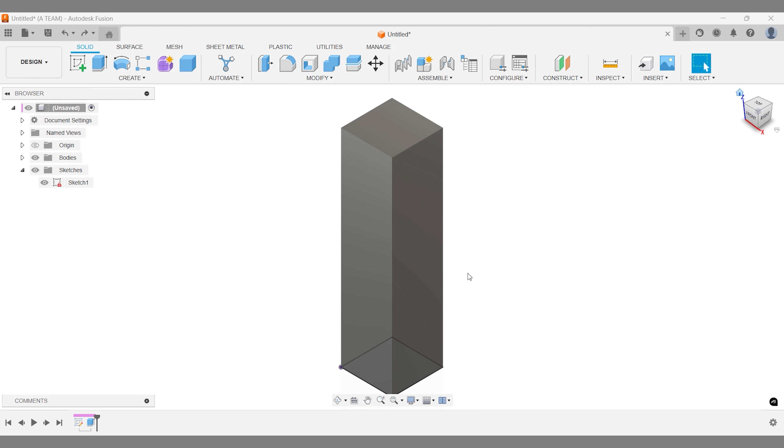Full round fillets automatically adapt to geometry changes in Fusion. This feature is particularly powerful when you're designing parts that will go through multiple iterations or adjustments, as it helps maintain a smooth and efficient workflow.

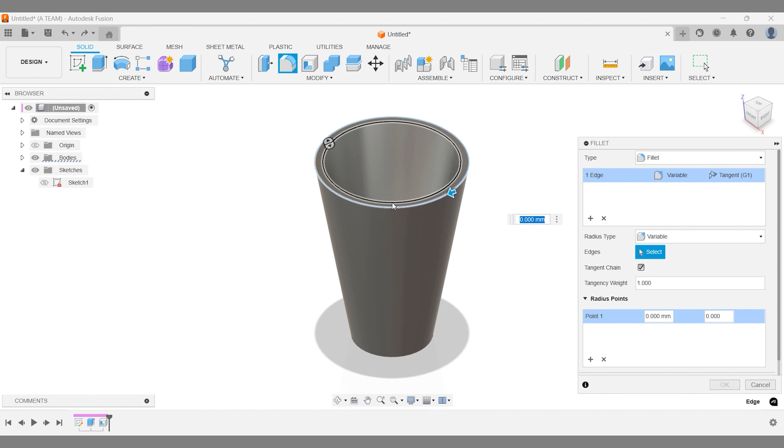Fusion allows you to create variable fillets with adjustable radii along the edge. This is perfect for organic designs or components requiring varying curves for aesthetic or functional purposes. By adding multiple points, you can craft intricate, custom geometry.

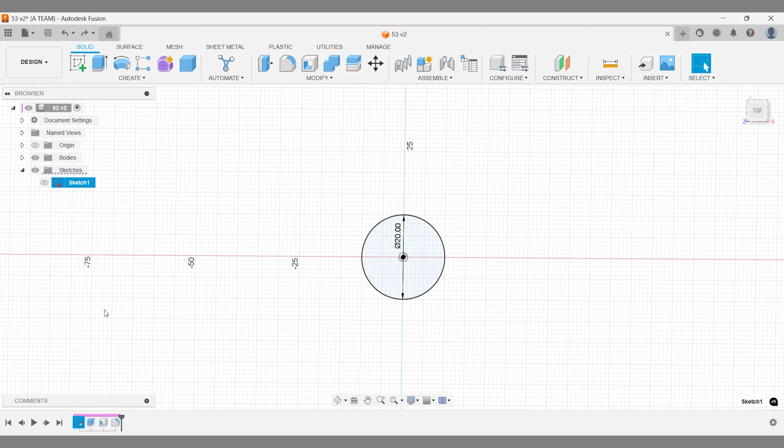Fillets work on 3D bodies and 2D sketches. Apply them to 3D bodies for smooth edges after modeling, or round corners in 2D sketches before extrusion, each suited for different design stages. Fillets aren't just aesthetic.

They reduce stress concentrations at sharp edges, improving the durability, strength, and longevity of parts.

Fusion offers various fillet types, radius options, and corner styles. You can select multiple edges, work with different selection sets, and choose from curvature settings.

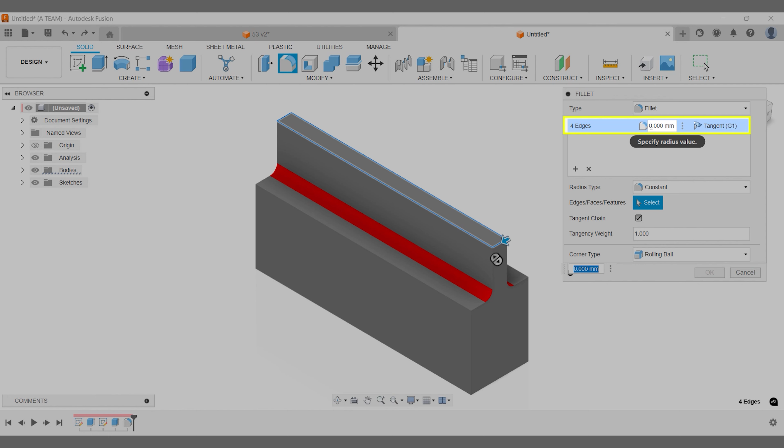G1 ensures smooth tangency with a slight curvature change, while G2 provides smooth, consistent curvature.